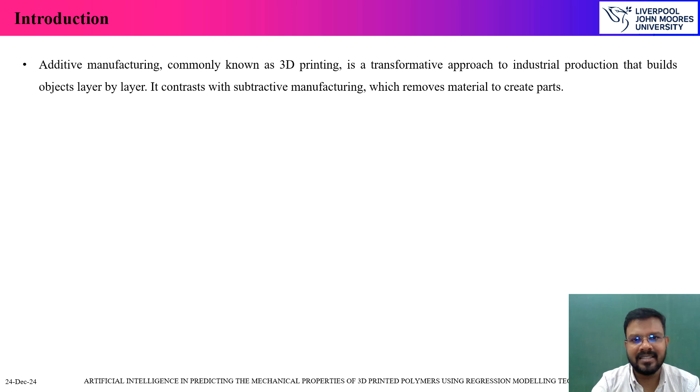Now, what is getting deposited could either be a metal, depositing metal over metal and simultaneously building the z-axis, or a polymer over polymer, building a component along its z-axis. It's basically 3D printing, defined in terms of its depth or height. This technique is most often used in new product development, where the tooling cost is very minimal because it's still a prototype, not the functional part. Some products are also produced to a higher quality, serving as a fully functional part, but however, most of its applications are exclusively limited to rapid prototyping or just as a prototype.

Now, how does this particular machine work? This machine or technique uses filament as its raw material, and these filaments are basically thermoplastic materials. It's not thermoset, it's a thermoplastic material which is recyclable. These thermoplastic materials could be polycarbonate, ABS, PETG, PLA, and many other materials.

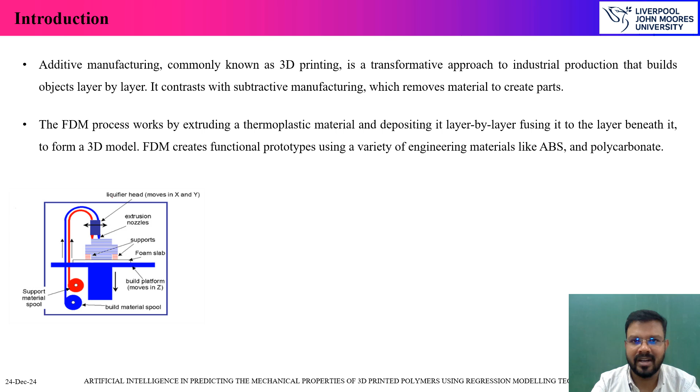Now, this is the overall schematic diagram of how the product is visualized, or how the machine is visualized, and this is the technique of how the product has now been printed along its z-axis. Z-axis meaning the vertical height of the component that is now being built. Having said this, the product quality matters a lot in estimating the price of the product that has been printed through this FDM process.

Now, this FDM process is also a technique in additive manufacturing, known as fused deposition modeling. This model extrudes the polymer, or basically the filament, once it is heated. So the heated filament is now being extruded layer by layer, and now we get to see the yellow part that has been witnessed in this particular animation or GIF image. Now, once we take a cross section of the part, this is the nomenclature of it: the air gap, the density, layer height, and the thickness at which we print.

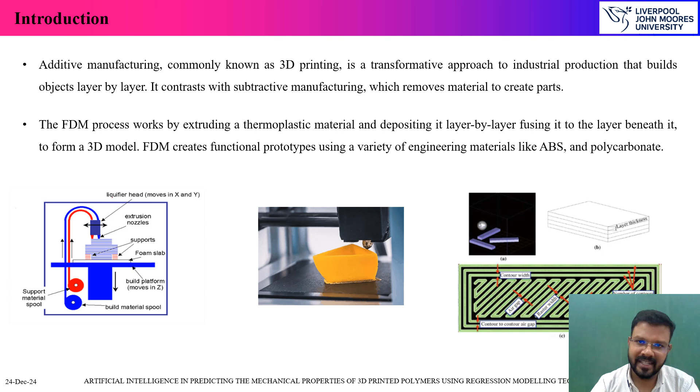This could be correlated in the best way: take a sheet of paper and start shading it with a small, sharp-tip pencil. You take more time shading the entire paper, whereas if you use a paintbrush, you cover painting the entire page in less time, because the width of the brush is larger compared to the tip of the pencil.

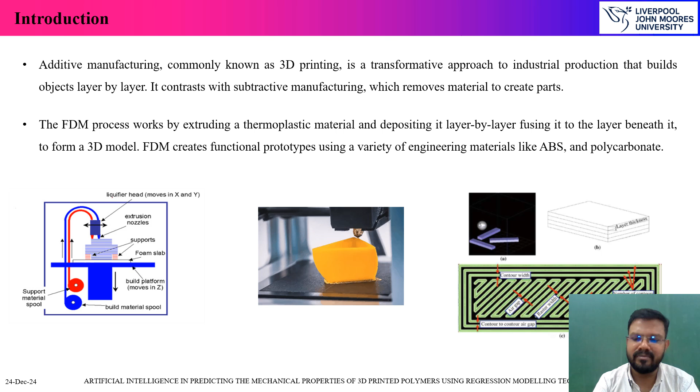These are the parameters we now focus on primarily in optimizing the quality, or in delivering a high quality product printed through this particular technique. However, the quality of the product is not just dependent on the material we use, it's also dependent on the style at which we print. By quality, I also mean the properties of the material once it is subjected to different types of conditional testing.

These are the important points that the machine primarily requires us to fine tune as its process parameters, in order to have a high quality, highly durable product. These include layer height, print speed, extrusion temperature, bed temperature, nozzle diameter, infill density, and so on.

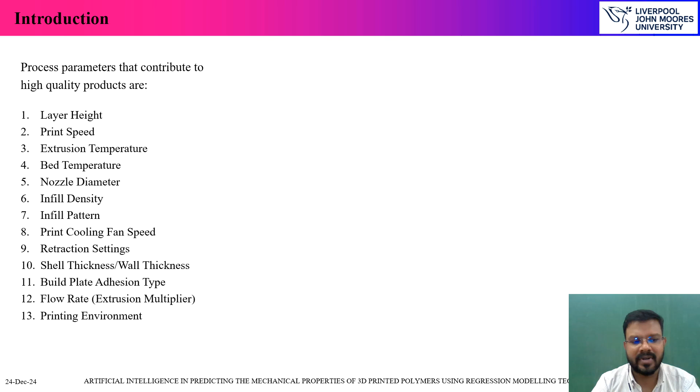Now, there is a platform at which we can control all these parameters, through Cura software. This is the inbuilt open source software that this particular machine uses, through which it is now possible for us to customize the product—meaning, customize the process at which the product is being printed.

For example, if you take a cell phone, you could print it right from the base, keeping this as the base. Or, if you want to build it in a better way, you can treat the bottom as the base and then print it vertically upward. That selection is completely done by the engineer who operates the machine.

The product built through this technique has its own unique properties—the strength is very dominant along one of its axes. It's as simple as saying you can split a bamboo stick along its length, but it's quite difficult to bend it along its diameter. That's the kind of property these 3D printed parts possess.

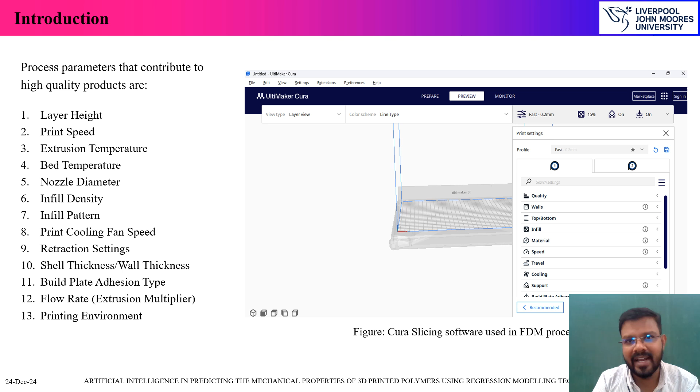Having said this, the property we are primarily targeting to predict is called the bending strength. This ultimate bending strength is the most important feature of the 3D printed part, which helps us use the product over a longer period of time.

It could be, for example, the back panel of a cell phone. Once you keep opening and closing it, it should remain a proper fit over repeated usage. So this gives clear information about its dimensional stability, without undergoing any deviations.

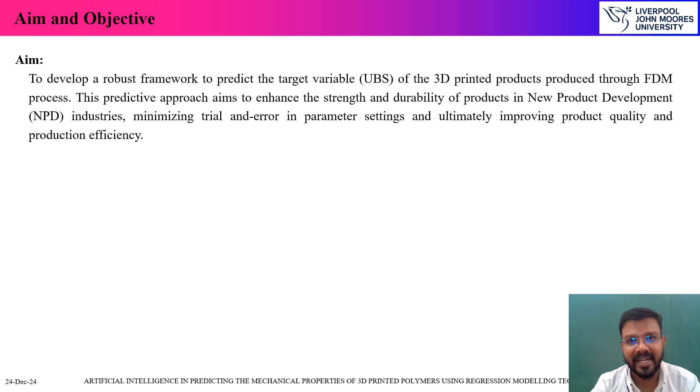Such estimations of material properties are now being done in the present investigation using machine learning models, without conducting experiments. With this intention, the project aims to develop a robust framework to predict the target variable—ultimate bending strength of a 3D printed part produced through the FDM process—which would help new product development industries reduce their time and expenditure, crucial when developing new parts or new materials taken to the next level of production.

With this aim, the objective of the investigation is to analyze the dataset for consistency—how consistent the data is, whether there is any skewness, checking and cross-validating the quality of the data—to explore the relationship between the critical factors that play a vital role in determining the mechanical or material properties of the printed products, and then to determine the most influential feature that dominates the overall characteristic of the product. Also, to design and optimize a regression-based model for accurately predicting the ultimate bending strength, followed by estimating the accuracy and robustness of the model.

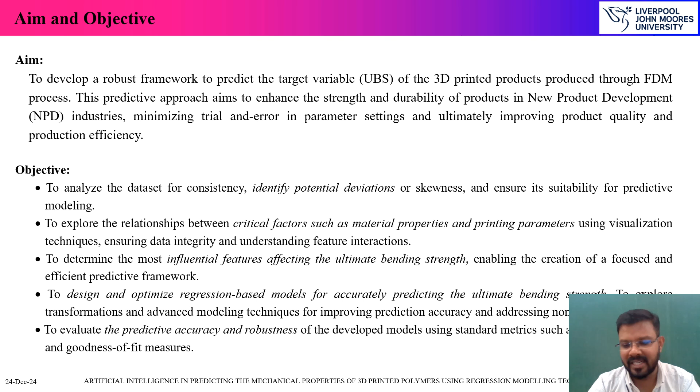With this aim and objective to be executed in the present research, the research is targeting a data source already published in the Harvard repository. It is already available there, which happens to be the initial stepping stone toward the present investigation.

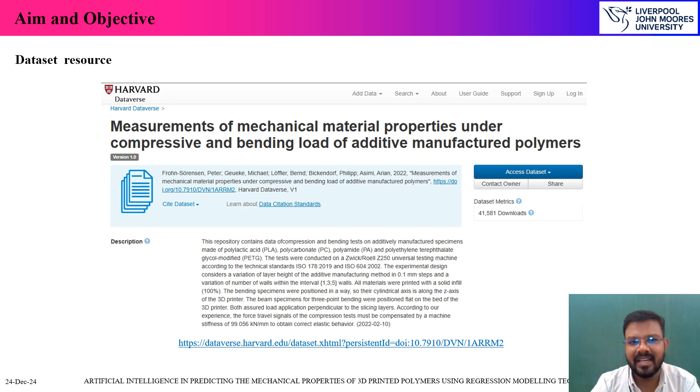Now, a small confirmation, this is the link for the dataset. And dataset access permission has been taken from the respective professor, Professor Frohn. Even though the dataset is available online, official permission was drawn from him on June 5th. Since then, the research is completely focused on the above defined objectives, aiming at how we get the best effective model.

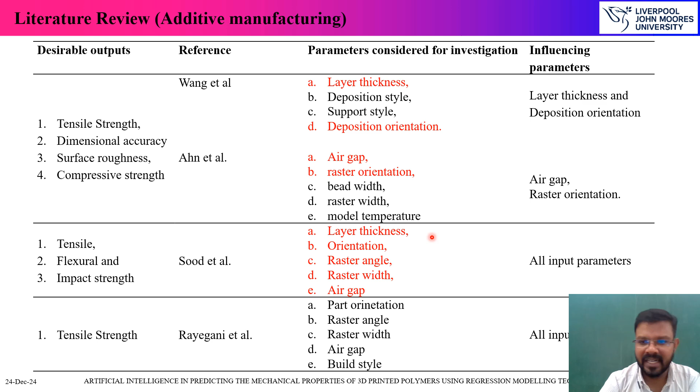Similarly, in the second set of papers, Sood et al. concluded that all the parameters of a 3D printer highlighted in the column are important features. Moving ahead, a couple of researchers have also inferred that parameters like slice thickness, build deposition, orientation, layer thickness, road width, raster angle, and air gap are dominant 3D printer settings which play a crucial role in estimating the surface roughness and the product strength.

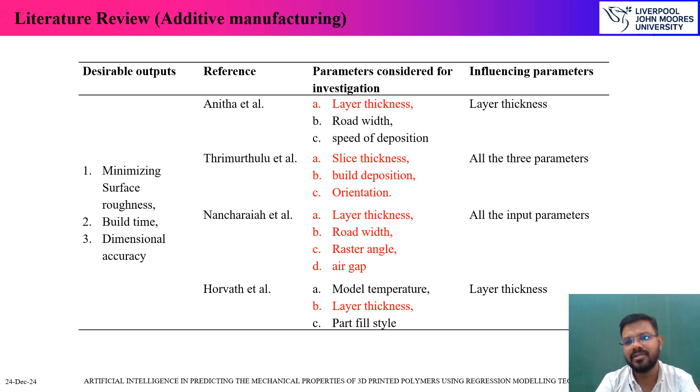To sum up the papers reviewed, only a part of them is displayed in the presentation; most are explained clearly in the respective section of the thesis. To consolidate what has been studied, the flexural or ultimate bending strength is what we are looking for.

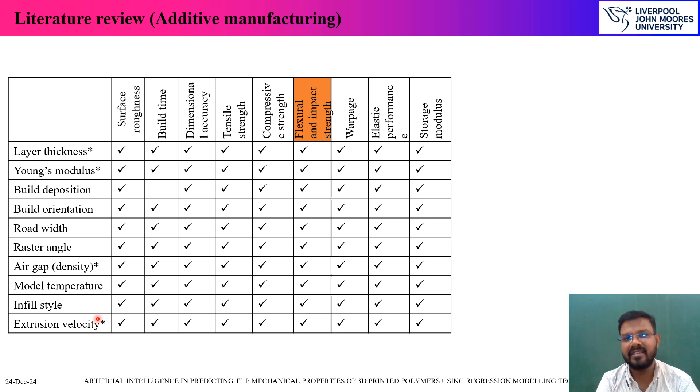To achieve this, all the ticked parameters play a vital role, including layer thickness, Young's modulus of the material, build deposition, build orientation, air gap, that is the density at which the product is printed, and the extrusion velocity. These are the most important machine settings for developing a product with ultimate flexural or bending strength.

From the literature reviewed, these are the four key parameters: layer height, infill density, print speed, and Young's modulus values, which are taken for the present investigation. The literature surveyed and demonstrated in the presentation justifies why we took these 4 parameters. This conclusion is also drawn from the primary paper taken as the reference for the present research.

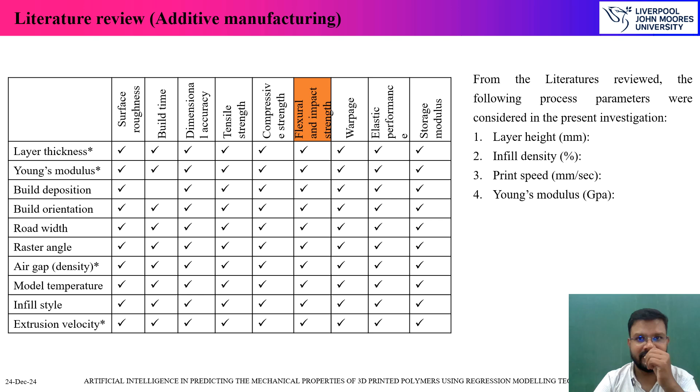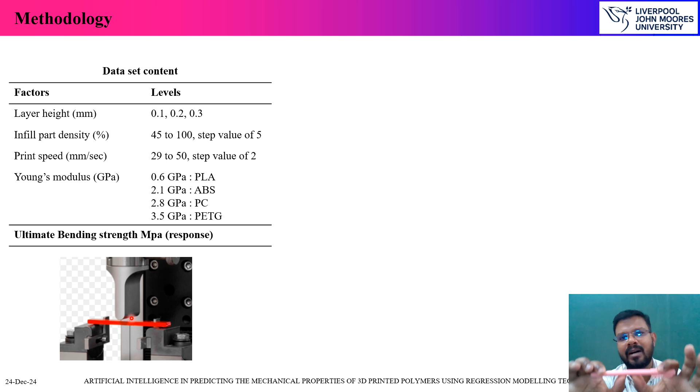Now, the purpose of doing this investigation is to minimize this process of printing the 3D printed part and then testing it as per the ASTM standards to get the measurable outcome, that is the ultimate bending strength.

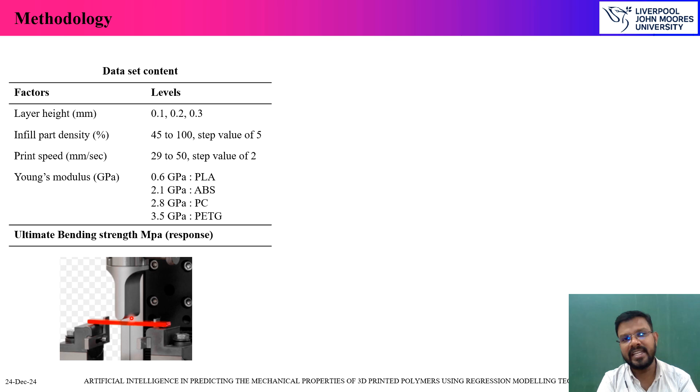So we are now trying to minimize this process of printing and also testing in order to get the desired result, the ultimate bending strength, by using a machine learning model wherein you can just directly substitute these factors at different levels, so that automatically the machine learning model will give you the closest ultimate bending strength of the material that has been printed with different combinations of these particular settings. Now, this is the methodology that we follow here.

Initially, the data set is loaded, followed with the inferences or the interpretation from the data visualization, understanding the multi-collinearity and also the interdependency of the different factors which could have a higher impact on the ultimate bending strength of the product. And in the next phase, we talk about feature engineering. Feature engineering is again split into two: one is feature elimination and the other one is feature retention.

Now, in feature elimination, we follow the ridge model. The ridge model is developed in order to produce a predictive equation at a higher level of accuracy. How do we measure the model accuracy? Through the mean square error and the R square value of the outcome from the regression equation generated through the ridge machine learning model. On the other end, once all the features are retained, we use a lasso regression, Box-Cox transformation, and then the higher order polynomial equations based on the literature reviewed.

However, the fine tuning of the model is done with respect to its alpha value and lambda value, which could be helpful in either eliminating or retaining the features, and then once again it goes back to the interpretation of the data visualization. It flows down in the same way, and this process continues until we get the best optimal value of alpha in the lasso and ridge equation and the best optimal lambda for the Box-Cox transformation.

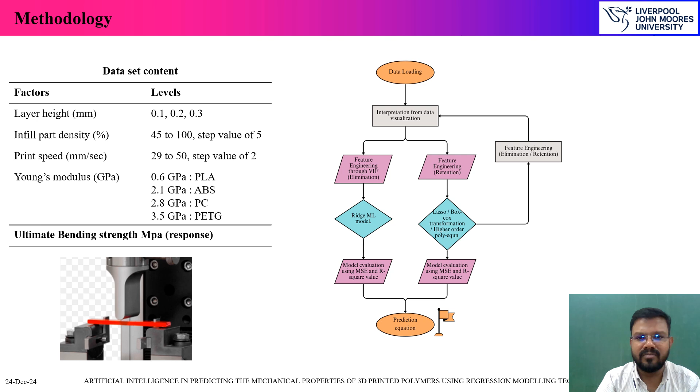So that doesn't mean we have the freedom to have least consideration in setting the machines. No, that's not correct. We need to have primarily a couple of settings which are very essential to generate a better quality product with a higher and durable strength. So in this context, we now start with the feature engineering, where the elimination or the retention of the features happens. As discussed earlier, we have four features: layer height, print speed, infill density, and the Young's modulus value.